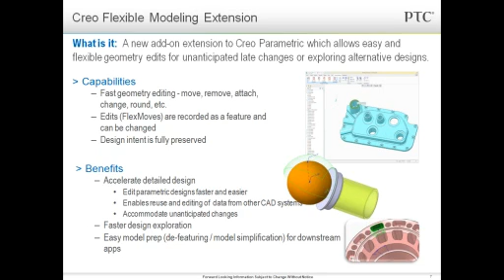And as I get into this, what I'm going to do is just fire up Creo Parametric. Now, the flexible modeling extension can only be part of Creo Parametric. So for those of you that are not using Creo Parametric, this is something that you might be able to get into a little bit later on down the line. For those of you looking to move forward, maybe this is something that encourages you to move a little bit forward.

All right. So I'm going to open up two different types of parts. One of them is a full Pro-E part. Has all of the features that you can possibly want, right? You see all the features right there. And then we're also going to open up this STEP file that I have, okay? Fairly simple, right? Nothing overly complicated, but it is an actual import feature that we will work on.

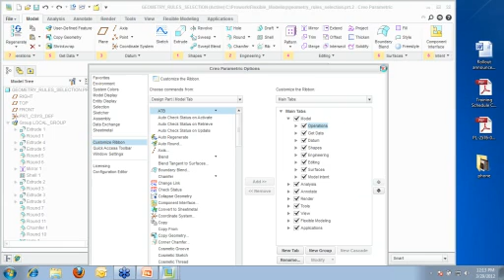Now, the idea with the flexible modeling extension is that, first of all, you see the interface up here. For those of you that haven't seen the Creo interface, this is the new Creo interface. This will be the idea going forward. The ribbon style interface is something that you'll see throughout the software from now on. I have the ability to customize the ribbon, take things in and out of the ribbon and create my own tabs. For time purposes, we won't get into too much of that today, but it makes it easy for you to control and see the buttons that you have.

But what flexible modeling does is give you, first of all, this tab. And it allows you to edit geometry based on these ideas that you see right here. Now, this is a full 100% parametric part. So let's say that at the end of the design process, a customer comes back in and says, you know what, Ben, I want to move this wall and this feature, and have some features underneath, and I want to move it 2 inches that way. Depending on what you built into your part, this could be something simple or something overly complicated.

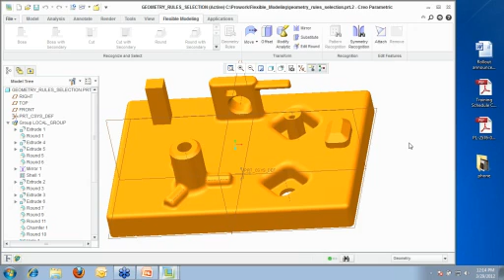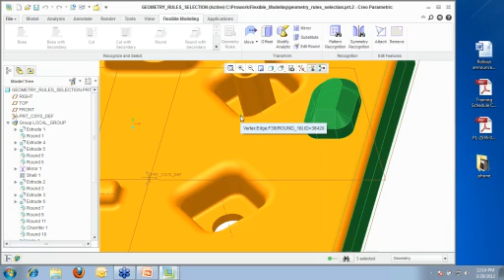So the flexible modeling extension just bases it on geometry. So I'm going to select the objects that I want to move. I want to move that surface. Just turn it upside down, hold the control button, pick that surface. Now, flexible modeling bases itself off selection ideas. So I'll continue to hold the control button, pick a surface, and say I also want that boss. So instead of picking multiple surfaces over and over again, I use the selection concepts to select multiple objects. I'll turn it upside down, hold the control button, pick that surface, and I also want the boss that goes with it.

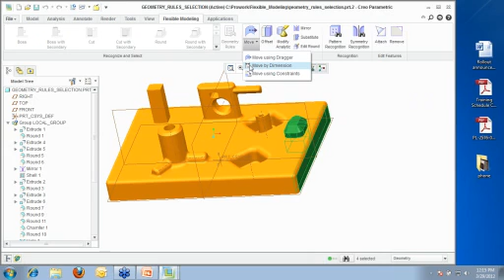Now, all I'm going to do is say I want to move this object. I can move it in a number of different ways. I can use something called the 3D dragger, or I can move it by dimension. And it asks how do you want to move it? Well, I want to move it based on this surface and off this surface. And from here, I'm going to extend it out from 350. We'll just drag it somewhere out here.

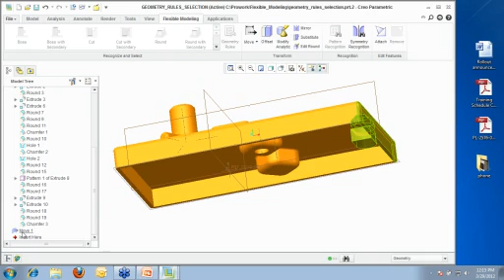And what you're noticing is that I have made a geometry change to parametric geometry. And what you see in your model tree is a feature just called the move feature. So if I wanted to, I can drag this back above and all my edits go away. I can drag it back down. I didn't change any dimensions. I just said take this geometry and move it.

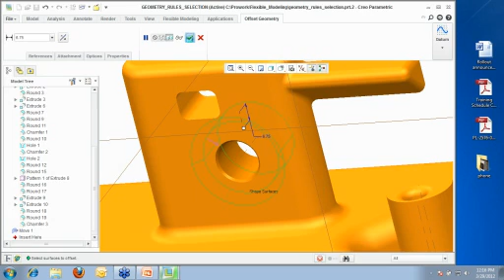Okay? All right. Same thing for holes. If I come in and say, all right, I want to move this cylindrical surface, I'm going to say I want the cutout with all the secondary, and I'm going to say I want to offset that in, and I want to offset it in a certain distance. Notice how the geometry adapts. I can do it to where the chamfer does or does not expand or stays proportional or not. I just move that hole. Okay, again, didn't change the dimensional value, just changed the geometry itself.

I can come in and pick this surface and say I want all of the secondary objects, and this time during the move, I'm going to say I want to use the dragger, and I just want to move it down this way, right about there like that. Okay, there's my new geometry, and moved it over. Again, you might have 50 different dimensions that reference edges and all kinds of crazy stuff. But all I'm doing is just manipulating geometry.

So what this is good for, especially in the flexible modeling part of it, when you're dealing with Pro-E parts, is that you have no idea half the time how someone built something. But you want to make a quick edit. You can do that very simply. Pick some surfaces, move that geometry, and you move it.

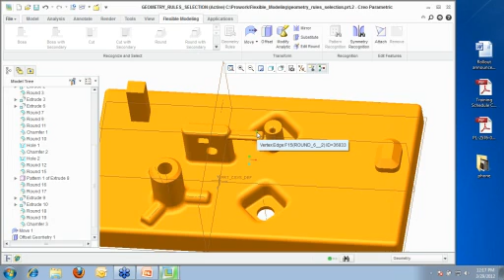Okay? Again, whether it's hole-based, you know what, I want to move this hole to a specific spot. Say, there's the surface, there's my secondary objects. I want to move it, and we'll move it somewhere right there. Again, I could do it dimensionally, but for this, I just moved it over a little bit. Now, this is Pro-E manipulation, okay? Pretty straightforward. It seems like it's pretty easy.

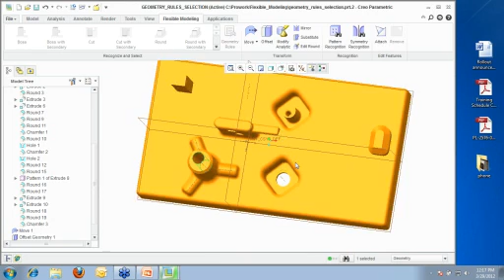Let's go ahead and go to our STEP part, all right? A lot of us deal with import geometry, and we want to be able to change that import geometry in certain ways. And if anybody's done that on the call or on the webcast, you know that can be a challenge, a definite challenge in some cases. So it's no different; what we could do with the Pro-E part we could do in this case with the STEP part.

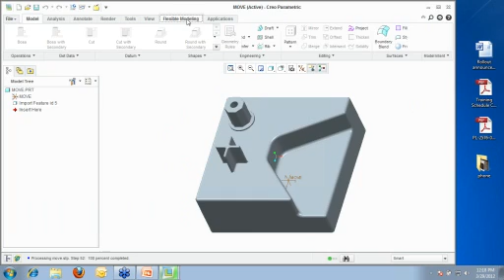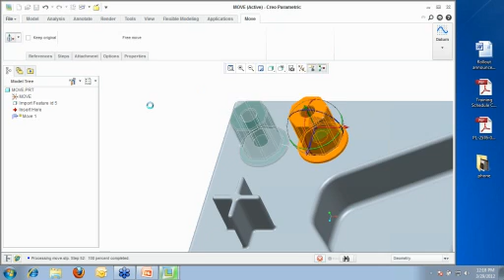So if I go up to my flexible modeling tab, okay, and I say, all right, I want to do something with the boss with the secondary, and I want to move this object somewhere. And again, we could do it by dimension, but I'm going to take this IGES or STEP geometry and say, hey, I just want to move that guy right there. Okay, there it is. I say okay, and what I've done is manipulated geometry.

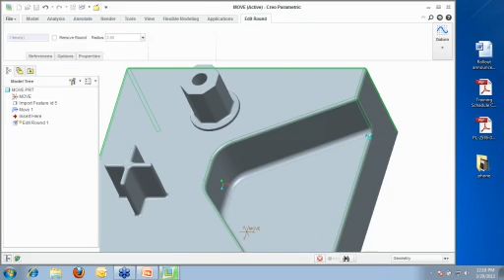Same thing with rounds. I can come in and pick my round, say I want all my secondary rounds. We can see it picks those rounds, and I say I want to edit these rounds. It will recognize the rounds, and I say I want to change them from 5 to 2.66. We just say okay, and I have manipulated, again, IGES and STEP data, when before, for those of you that have done this before, you know this really wasn't possible.

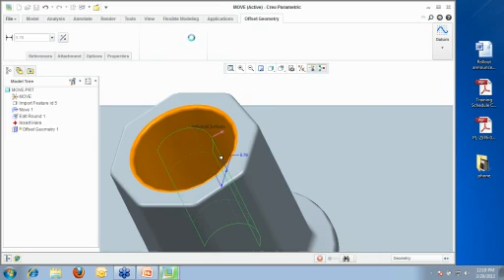Okay, so we have the same move ideas. I have the same offset ideas. Notice how in this STEP file it has a round with the hole. I'm going to say, hey, I want to go ahead and pick that hole and move it. Notice how the rounds manipulate and move right along with it. So I'm not destroying geometry. The software is intelligently recognizing what the geometry is, what is attached to geometry.

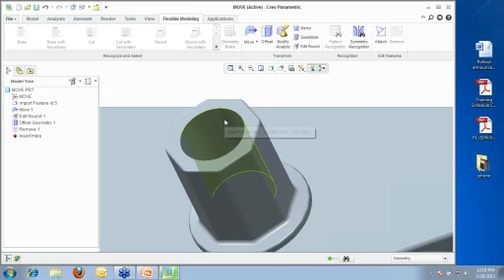Okay, let's say that I didn't want that round anymore. I can come in and pick that surface. There it is. Pick it. Say I want all my rounds, and I'm going to say I want to remove those rounds. Okay, notice how I remove those rounds. So again, if you're doing FEA work on IGES or STEP data, removing rounds and removing chamfers can be painful. So I'll come in and say, hey, here's all my rounds. I want to remove all those rounds, and there are the results.

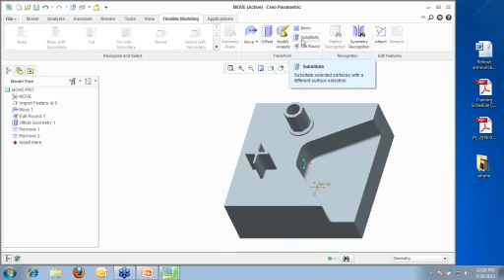Okay, so again, I keep reiterating this, but this is IGES geometry manipulation. And whether it's Pro-E or IGES, with the flexible modeling extension, this is what this specifically gives you. All right, one more thing: I'm going to use this substitute command. It's kind of a cool command to see work.

I have a part that's kind of set up for that. Notice in this part how I essentially have just a bunch of Pro-E geometry, okay? And there is a version of this command within Pro-E, the original Pro-E command, right?

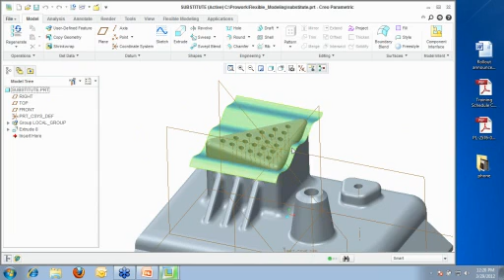There is a replace function, but this one's a little bit different. If I come in and say in the flexible modeling tab, I'll say substitute. This is, what do you want to substitute? I'll substitute this surface. It says substitute with what? I'm going to substitute with this little looks like a little extruded surface that I have right here. And what you're going to see is a substitution of that surface.

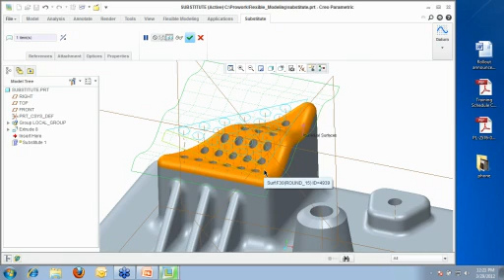Now, what's different about this compared to the substitute that's in, or the replace that's in Pro E, is that notice how it reconstructed all of the round geometry. And that's really cool, right? It's not like I'm just cutting it off and then I have to recreate my rounds. I was able to create an entire new surface of any shape that I wanted to.

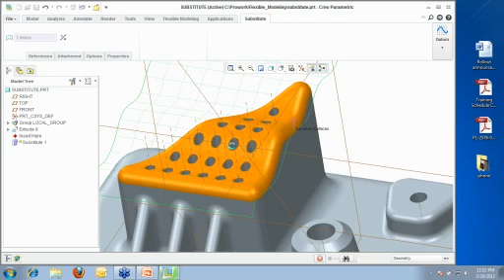We wanted to test 5 different shapes. Okay, I come in and create all those little surfaces that I want. I can replace it, and notice how it reconstructed all of that round geometry right there. That's kind of impressive if you've ever seen some other tools work. All these rounds again go back in and it's really not regenerate, but they reconstruct themselves.

So a lot of different simple tools that you can use that streamline some of the editing, downstream edits, whether it's IGES data or whether it's Pro E data, and some of those concepts, and at the price that PTC offers the flexible modeling tool, it's really hard to beat, and it pays for itself really quickly if you ever catch yourself in any of these situations.

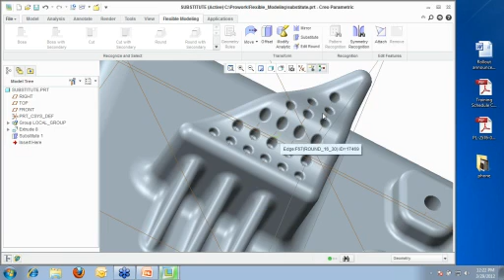Okay, so here is the flexible modeling tool, and this is what it's for. Now, this is just geometry manipulation. I have geometry, I want to move it, change it in size, whatever it may be. What Pro E also offers, what PTC also offers, let's go ahead and close a few of these down.

Is that they also offer the Creo Direct package. Now, the Creo Direct package is a standalone package that allows users that might not use CAD to be able to quickly come in and add things to Pro E models, or create their own new, what are the common data files that you can read back and forth. Okay, so if I go ahead and say File New right here, notice how I only have part and assembly. In the Creo Direct you create parts and you can create an assembly.

So I say I'm going to create a part file. There we are, and this is it. This is the interface that you have. So for those of you that are Pro E users, really hardcore Pro E users, here's your sketch tools. Right here are your sketch tools, and those look like sketch tools. You see some of your extrude tools and revolve and sweep. Notice how you also have those same editing capabilities, and then you have some of your other recognizable Pro E tools.

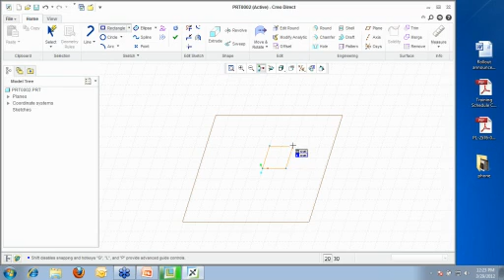So what I'm going to do here is say, hey, I want to create a block, and we'll do some different things with the block. I'm going to say, all right, rectangle, and this is a little bit hard to see, but I have essentially coordinates that originate that rectangle. So I'm going to say I want it at 0, 0, and then I'm going to take it out to 10, 10. There we are, and now what I have is a 10 by 10 block. Now, once I do that, I can say I want to extrude that block. There it is, and now I am extruding that block, very similar to what you might see in Pro E. You create a 2D shape, and you get a block from it.

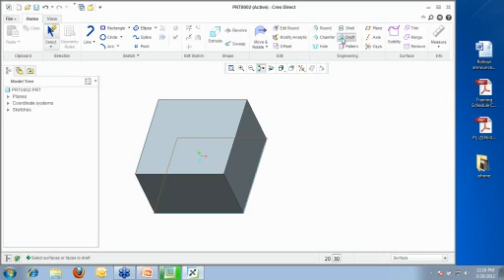Now, all the other tools that you use are fairly similar and they work pretty much the same. So, all right, I want to put draft on. So I'll say draft, I say I want to draft this surface, and I want to draft it from that guy, and there's draft. Okay, pretty simple, easy way to pick tool for those non-heavy CAD users that want to create blocks with draft and maybe edit something. You have the ability to do something like that. Okay, put my draft in. There's my draft. I want to put a hole in.

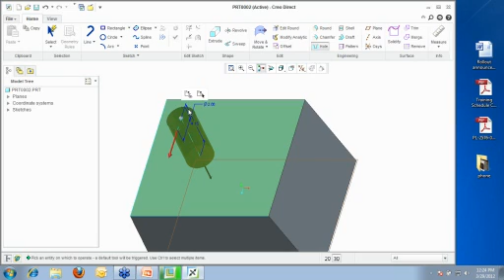Simple, come over here and put a hole. By default it says, okay, here's where I'm going to reference that hole from. I actually say, you know what, instead of it being from there, I actually want it from here, and I want it from right there, and now I have dimensional values that I can control also. We'll kind of put it in a specific spot, and there's that hole. Let's say I want to pattern that hole. I'll come in and say, here's my hole that I want.

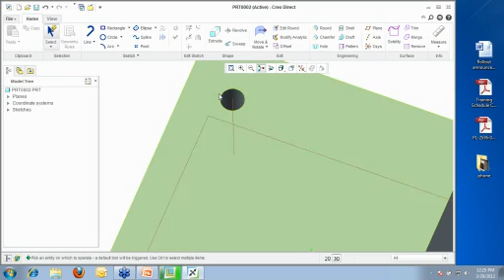Let me make sure I pick all of it. There it is. We'll pattern that hole off of this shape right here, or off that side. We'll drag it that way. I've got to make sure I do this right.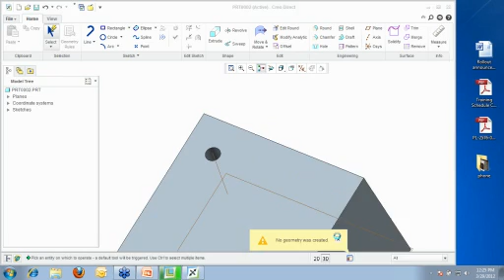There it is, we'll say pattern. See if I can get it right this time. There we go, okay, I'll say I want 4 of them. There we are. Again, quick ways to pattern objects.

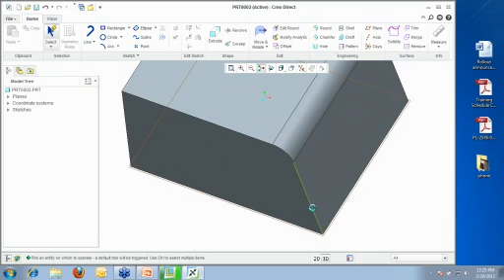I have round capabilities. Come in and say, hey, on my edge, I want a round. There's the round that I want. If I pick this edge, create another round. There we are.

Now, what's also fairly unique about this is if I come in and say, alright, I want to sketch right here. Let's do this. I'm going to create a circle, and we won't put too many dimensions in it this time. There we are. Okay, and I'm going to create a line from here to there, and then a line from here to here.

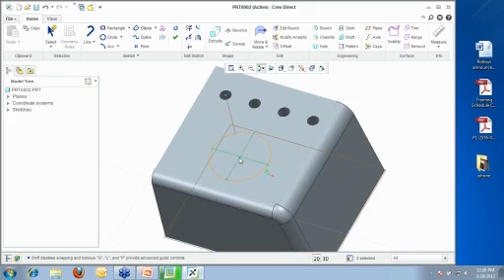One thing that's kind of unique about this, and this is actually a product of the CoCreate, is that if I come in and say, alright, I want to extrude, notice how I can pick specific sections of that. So essentially what it recognizes are areas within that sketch.

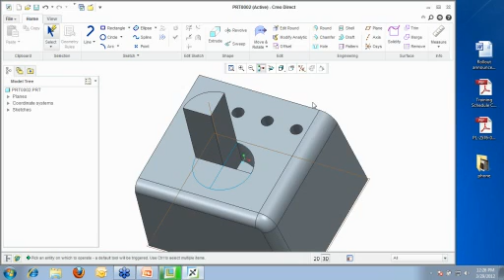So there it is. Let's say I want to create a cutout of that area. Again, I'll say in this case, I want to create an extrude out of that one. Come over here, create an extrude out of that one.

This is kind of cool stuff, right? Come over here, pick this one and say I want to create a cut out of that guy. So out of that one sketch, I was able to use multiple sections of that sketch to create really different types of features. I have an extrude, I have a cut, and pretty straightforward stuff when it comes to that.

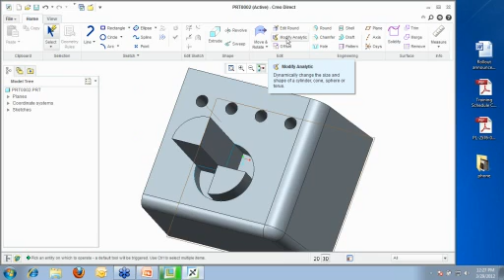Now, just like we had before, I have the ability to come in and use some of the editing capabilities. So I'll come in and say, alright, now I want to pick this wall and I want to move it just this way. I want to move it somewhere out here. Okay, you see dimensionally it moves, right?

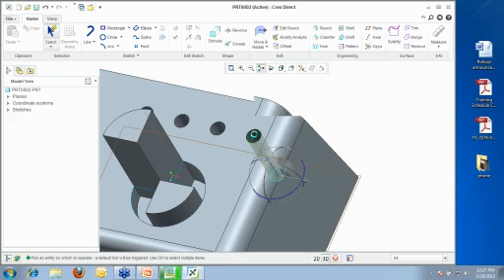I can go ahead and move this hole if I wanted to specifically. Remember, we patterned that hole. Say, alright, I want to move this hole, and that hole. Actually, let's pick the whole thing. Okay, there it is. And I want to move that hole somewhere right about there.

Okay, again, what was it part of? It was part of the pattern, but what is it? It's just geometry. If I wanted to back up, I could go ahead and say, there we are. Let's go ahead and back up to where I was. There it is, alright, let's go. And then what did I do? I just moved it backwards.

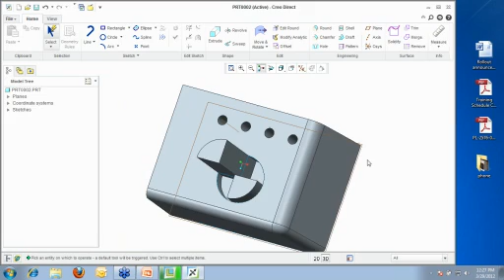Now, not only do I have part modeling capabilities within the Creo Direct app, I also have the ability for assembly purposes. Okay, now let me make sure.

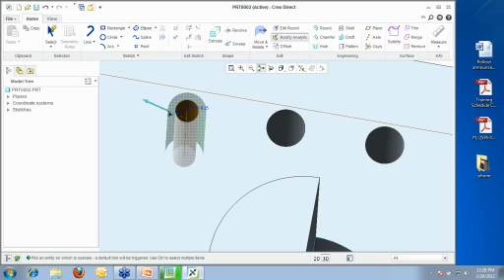I don't remember exactly what size this guy was here. Let's do it like this. I'm going to take it, let's say modify analytic. Okay, so let me go ahead and reduce that down about a half inch, somewhere right there. Okay, there we are, so there will be a half inch diameter.

Now, let's go ahead and save this part. Say new assembly. Now, just like in Pro E, when I put in a part, it's expecting it to go into a specific spot. So we'll say here's our part, right? There we are, let's go ahead and drag it out the way.

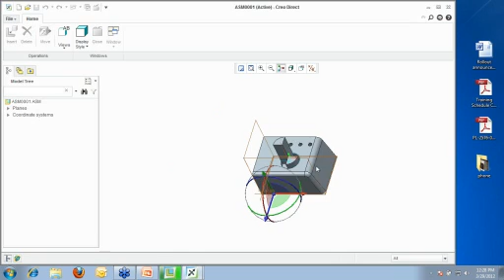For those of you that haven't seen assembly in Creo Parametric, it does have this 3D dragger where you can drag things around and spin it and turn it. But what happens in the Creo Direct app is that it doesn't have insert, mate, or align, or the coincident and distance ideas. What it does is just snap from one reference to the next.

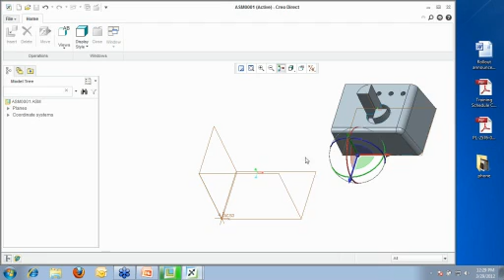So if I come over here and pick this surface, as I drag, notice how I snap, see how it snaps to that datum. So if I wanted to assemble objects, at this point in time, it just works off a snapping mechanism. So I'll say I want to snap it there. Let's go ahead and pick the bottom surface.

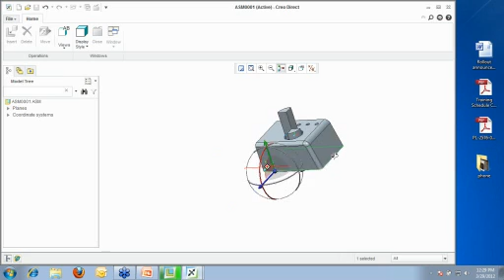There we are. Let's go ahead and make sure that guy's snapped down. Let's go ahead and pick this guy, and I want to snap it. Oh sorry guys, we've already snapped that one. Let's just leave it in that spot. So we snapped it over into a spot. I guess we can go through our move.

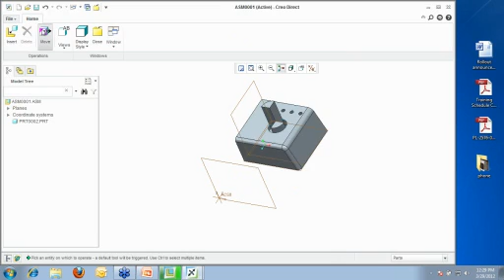Go, let's snap it here. There we are. Okay, so we can go through move and put it in the spot we want. Now, can I put in other components?

Let's go ahead and put in a Pro E component. Now if I go back to the Pro E portion of it, or Creo Parametric, see how I have this bolt. There's my bolt, right? Here's my bolt that I have. If I go back to Creo Direct, let's go to the assembly, and I'm going to say I want to insert an object. Here's the bolt that I have, and I now can insert my bolt.

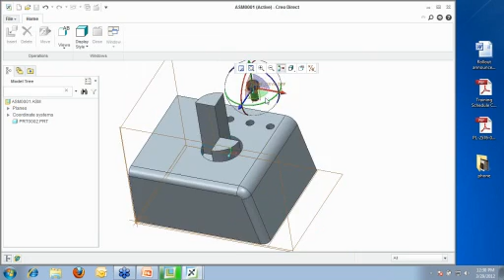So we'll kind of drag it into space, move it over to somewhere close that we want. I'll pick that cylindrical surface, and if we go ahead and drag it from there, notice how it snaps directly to that hole that I have right here. I can come in and pick that surface, go ahead and drag it down, and we see that it snaps into that specific hole.

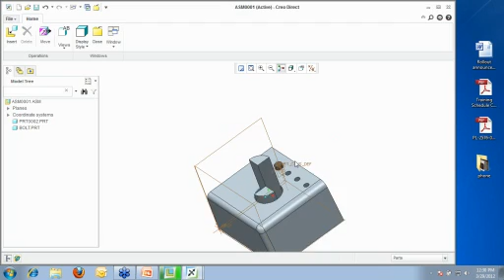If we want to move it, we go ahead and pick the bolt and say move, and then we can move it to a different spot. Now here's my part that I have. Here's my assembly that I put together. Let's go ahead and save that, save it into a specific spot.

Now what I'm going to do is go ahead and close this window. There it is. We know we have that part open, but we don't have our bolt open. Let's make sure we erase it. It does work off the memory.

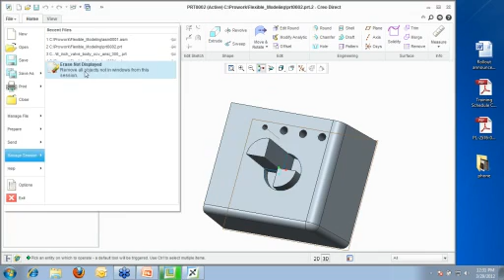Now if I come to this part right here, let's go ahead and put another feature in it. I'm going to come in and put a hole right here. We'll just put in kind of a generic hole just to make some geometry change right here. We'll put it in kind of a weird spot just so we see that we have a hole. Let's go ahead and say File Save.

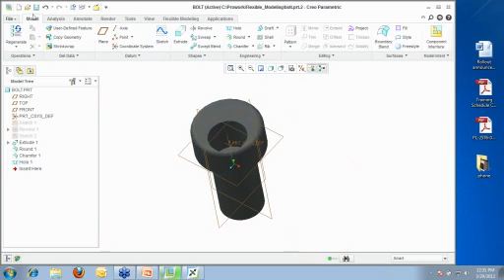Now if I come back to the Creo Direct app and open this assembly up, there we are. Notice how the part updates. So again, these are not disconnected systems. They do not have individual parts for this package and individual parts. They work off the same common data file.

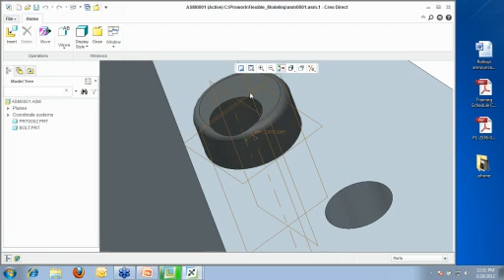If I come in, here's this part 2. What I can do with this part 2 is go back to Creo Parametric and go ahead and open up part 2. One thing I want you to notice here is what do you have? You have all of the features that were actually built, even though you didn't see them building, and in the background of the Creo Direct app, it actually has all those features.

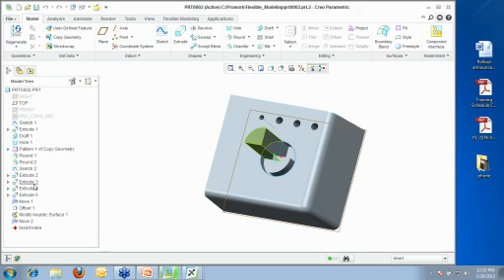At this point in time, if I had someone outside of the engineering realm who says, hey, look at this thing, and you're like, okay, let me take a look at it. We need to change these rounds. Well, maybe I don't have Creo Direct, maybe I don't care to use it that much, but I can come in and change all of my rounds. I'll do an edit right here. Instead of being 1.2, we'll say 0.5. There it is, and I've changed that round.

So for those of you that haven't seen too much of what PTC has been offering, you get an idea of this concept of the common data file. This is really what PTC is talking about, where they're creating software or pieces of software that fit a number of different users, whether it's the hardcore engineering team or just some prototyping guys, making tools that are easy for different people to use, while at the same time making it so that data can be absorbed by other portions of software that PTC puts out.

So you have the flexible modeling tool, right? And then you have the Creo Direct application. The flexible modeling extension is an extension that you buy that extends onto Creo Parametric, and then you have the standalone piece of software that is Creo Direct that you buy, that you use as if it was standalone.

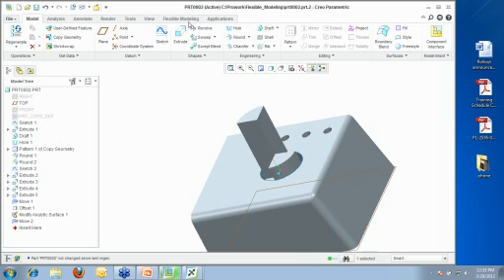Okay. Now, one thing that I didn't show you, and again, just an idea here on flexible modeling, is that if I go ahead and open up this cool little assembly that I have, where's that? This. All right, this little hand assembly, and I think it'll be a big bird's nest if I don't turn off all this stuff. Yep, there we go.

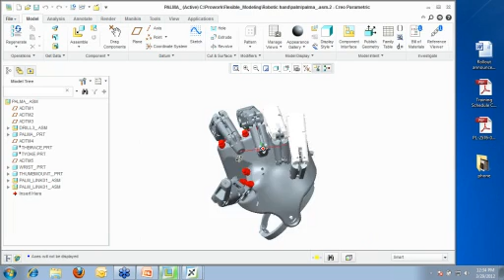Okay, so I have this little robotic hand, right, and what you'll see here is that the little fingers have holes on them. Okay, now, if I come in and say, hey, I want to assemble this little finger pin, okay, I just made a little cylinder to assemble, and I'll kind of drag it a little bit closer so we can see size-wise, right, and what I'm going to do here is I'm going to come in and say, all right, I want this.

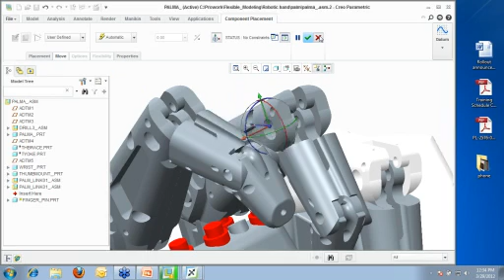Let's open up my finger pin here just for a second. Let's open it up. There we go. Okay, that's what we should be seeing. Let's go back to that. Say assemble. Assemble the finger pin. There we are. There we go. Now I can see it.

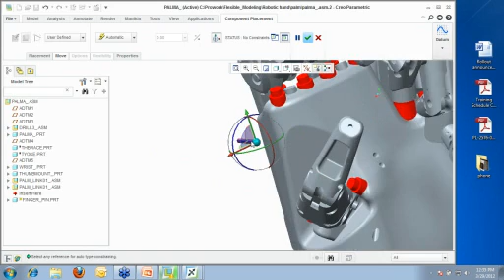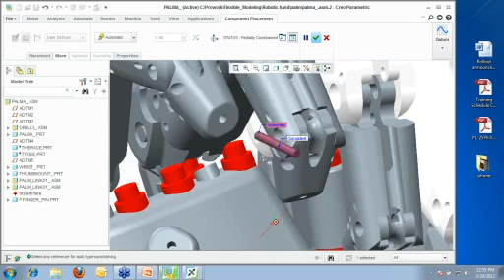Okay. All right, so I'll say I want that cylindrical surface, right, to apply into that cylindrical surface. Let's go ahead and drag it back over here. There we are. And then I want that flat surface into, so we can see it a little bit better, there it is, onto that flat surface. Instead of it being a distance, I want it to be a coincident. And what I've done is assemble that pin into that finger hole.

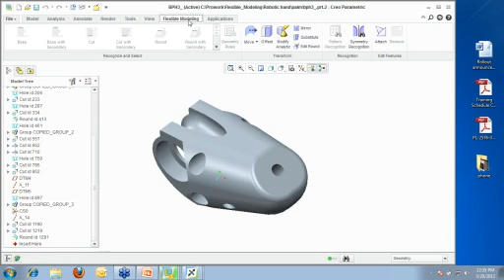So again, come into the flexible modeling. I'll say, hey, I want to move, right? I want to move this guy right here, and I want to move him this way. There it is, and I just want to move him over. Okay, we just moved it over a certain distance. Again, it could be based off dimensions, but we want to move it. There's a move that I created.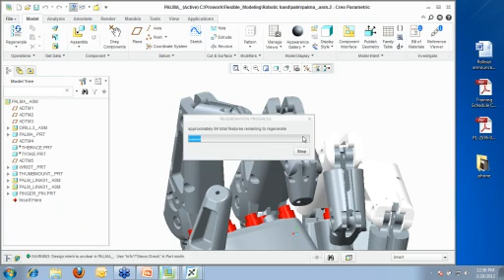If I come back to the assembly that I have, right, and do a Control-G for regenerate, we do our regeneration, and what you'll see is that part, right, move over right along with it, okay? So again, when we're doing flexible modeling moves, if you go back and look at this, right, what you're really creating are features, in this case on the Pro/E, at the end of your models.

And again, when I want to move it back, if I just would say, you know what, I don't like that, either you can delete it, you can drag your insert back above it, and it just allows you to make these nice, quick edits without all the complications sometimes of you knowing what's going on or having to deal with the things that as a company we decided to build into this.

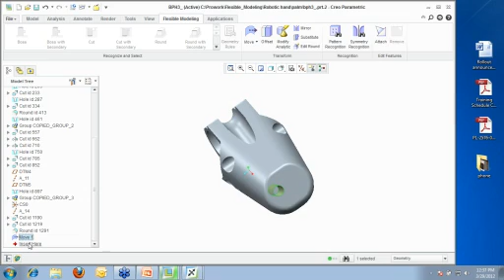And this is really where the flexible modeling extension comes into, and in the Creo Direct app, you can move files back and forth, make geometry. You know, if we wanted to open this up in Creo Direct and add a little boss on top of it, or a little indentation or something like that, but I wasn't doing that. Maybe we have one of our prototypers, they just want to use it, but they don't use Pro/E that often. They could use the Creo Direct app to get in there, make some of those features, and when I want to look at it, I open it back up in Pro/E and make some changes that I have into it.

This is what is considered to be the common data model, and you will hear that a bunch from PTC, whether it's 2.0 or even as you move forward from there. The common data model, that's the goal and the concept of what PTC is trying to accomplish.

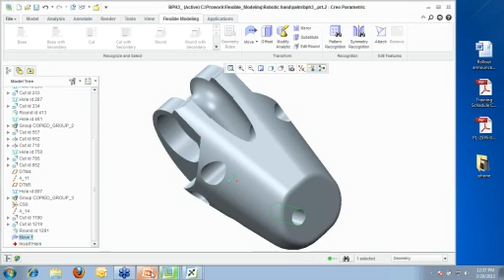Okay? All right. A last little tidbit in the slides that I wanted to show you, just so you guys can see this. I think it's important for everybody to kind of understand this, is that these are, at this time, the direct modeling pieces of software that PTC offers.

So we covered the flexible modeling extension, and it is an extension of Creo Parametric. You have the Creo Direct, where we open it up, create a little bit of geometry, put the assembly together with the snapping functions, open up the bolt, kind of went back and forth and looked at it, right? Standalone software, works off just the regular licensing idea. Okay, standalone app allows you to create simple stuff, make some edits for Pro E parts and/or the Creo Directs.

And then what you have is Creo Elements Direct. Creo Elements Direct is CoCreate. Okay, Creo Elements Direct, for those of you that aren't familiar with the terms or even confused with the terms, and I guess we can cover this quickly, it's just something that I think it's important to educate everybody on, is that anything that is called Creo Elements Direct is not what most people are thinking Creo is. It's the Wildfire 5 idea and back.

What PTC did was take mainstream Wildfire 5 and made a branding change. And what the branding change was, is they took Wildfire 5 and made it into Creo Elements Pro. And then what they made CoCreate into was Creo Elements Direct. Okay? With Creo Parametric or Creo 1.0, for those users that are using Creo Parametric, think of it, and I know PTC wouldn't necessarily want me to say this, as Wildfire 6. So Creo Parametric 1.0, big key word, 1.0, would be the next version of Pro E, and for everybody to relate, Wildfire 6.